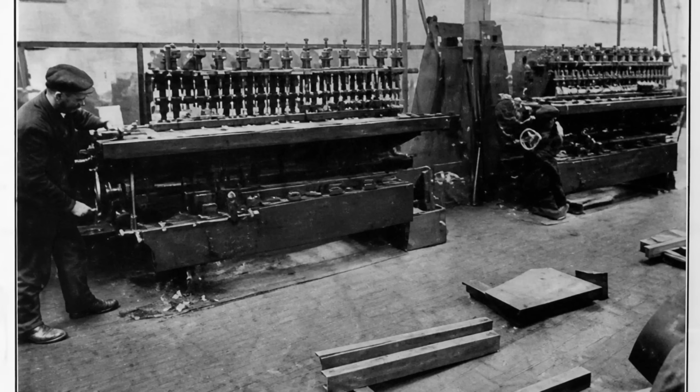At its peak, Alfred Herbert Ltd was the largest machine tool manufacturer in Europe. Its capstan lathes cut the steel for artillery shells in 2 world wars. Its sales network stretched across 5 continents. The Edgwick Works in Coventry covered 23 acres of foundries and machine halls that never stopped running.

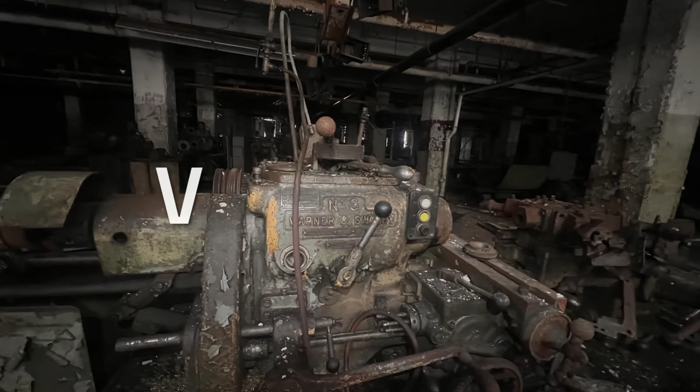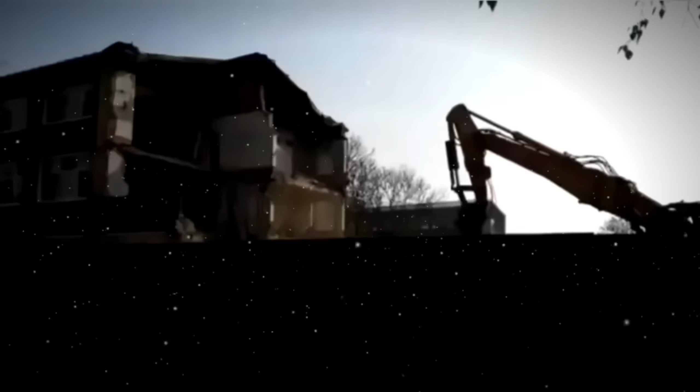Then, in less than a single generation, it was all gone. The British government poured in millions to keep the company alive. It wasn't enough. The wrecking crews tore down every building on the site and replaced it with a retail park. This is the story of the man who built an empire on precision and the company that couldn't survive without him.

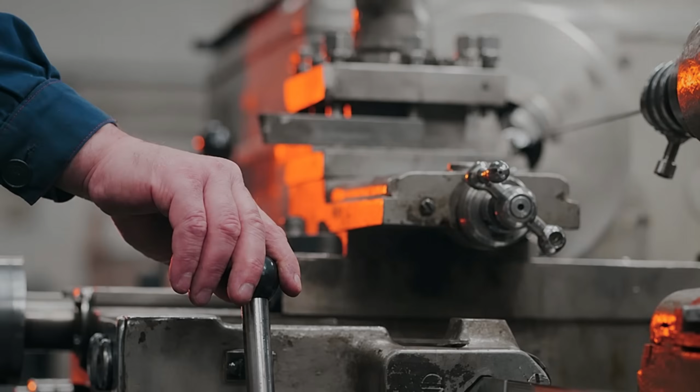Alfred Edward Herbert was born on the 5th of September, 1866, in Leicester, England. His father, William Herbert, was a prosperous man. Not gentry, but comfortable. He farmed 322 acres at Whetstone, south of Leicester, employed 13 men and 7 boys, and owned a townhouse on Regent Street. The family assumed their second son would attend Oxford and enter the church. Alfred had the grades for it. He excelled at English, science, and divinity at Stonygate School.

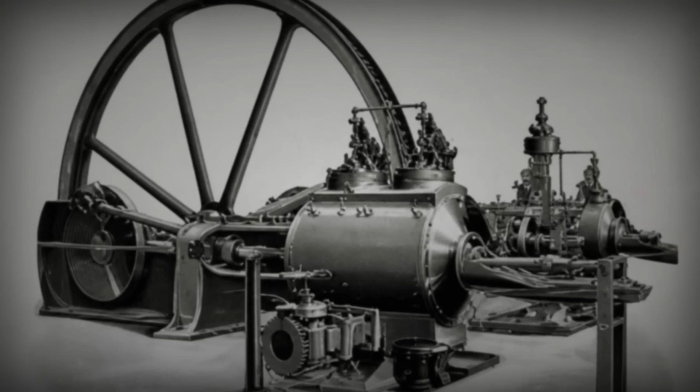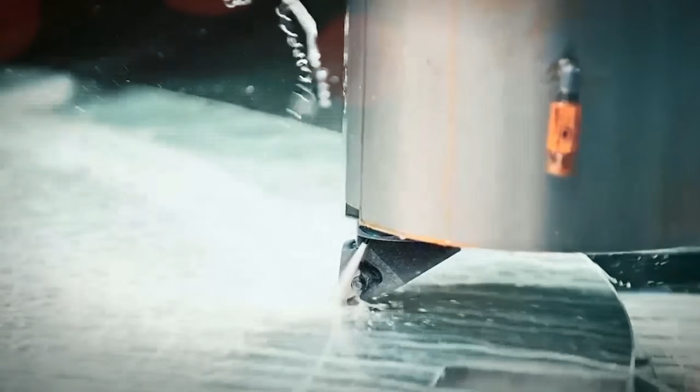But Alfred wasn't thinking about sermons. He was thinking about lathes. An old school friend named William Sammons Hubbard was working at Joseph Jessop & Sons, a crane-building firm in Leicester, and Alfred watched him operate a small metal-turning lathe. The way the tool met the spinning workpiece, the clean curl of swarf peeling off iron. That was the moment. He told his father he wanted to be an engineer, not a clergyman. His father, to his credit, agreed.

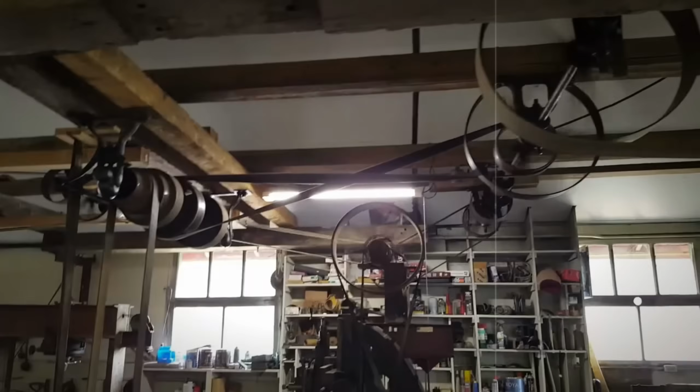Herbert served his apprenticeship at Jessop's through the mid-1880s. It was foundational work. He learned to read castings, to feel tolerances by hand, to understand what separated good iron from bad. By the time he finished, he could walk a foundry floor and tell you which castings would hold up under cutting loads and which would crack. That instinct would define everything that came after.

In 1887, at 21 years old, he left Leicester for Coventry to take a job as works manager at Coles & Matthews, a struggling engineering and repair shop in an area called the Butts. The firm made small boilers and agricultural tackle and barely kept its doors open. Herbert's elder brother, William Henry, was already connected to Coventry's cycle trade through the Premier Cycle Company, and he helped arrange the position.

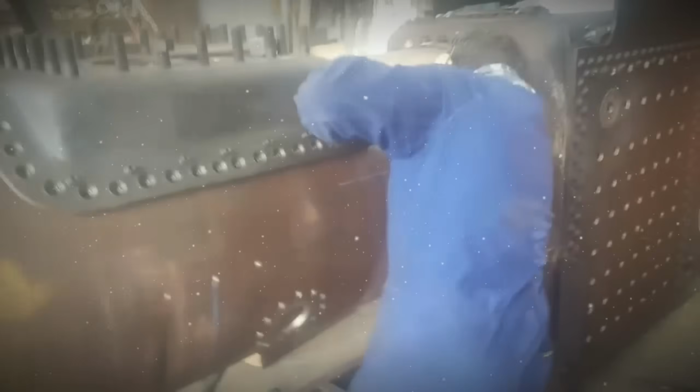The following year, when the owner Matthews retired, Alfred saw his opening. He and Hubbard, his old school friend from Leicester, bought the business for £2,375. Each man's father put up £2,000 in capital. The partnership traded as Herbert and Hubbard, and in the beginning it had nothing to do with machine tools. They built boilers, plowing tackle, steam engines, and whatever else walked through the door. One of their early commissions was a pill sorting machine.

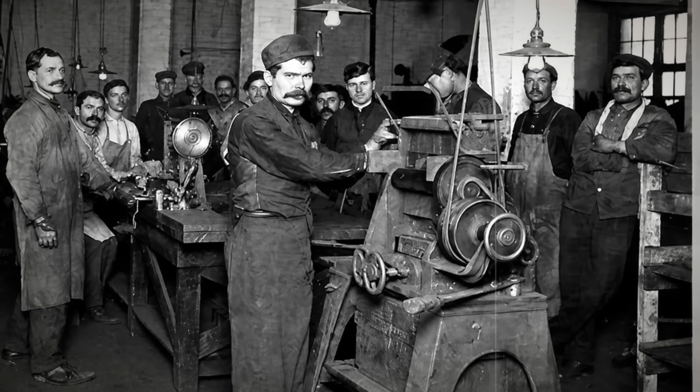What changed everything was Coventry's bicycle boom. By the late 1880s and into the 1890s, the city was the center of British cycle manufacturing, and every workshop needed precision tools to build frames, wheels, and components at speed. Herbert secured the agency for a French patent related to weldless steel tube production, a process critical to making bicycle frames lighter and stronger. The connection came through his brother William Henry, who introduced Alfred to a Paris-based tube manufacturer.

The economic historian Roderick Floud later observed that the firm entered machine tool production almost by accident, pivoting on the profits from that single patent. Herbert and Hubbard began building polishing lathes, drilling machines, rim-bending machines, and spoke screwing machines tailored specifically for the cycle trade.

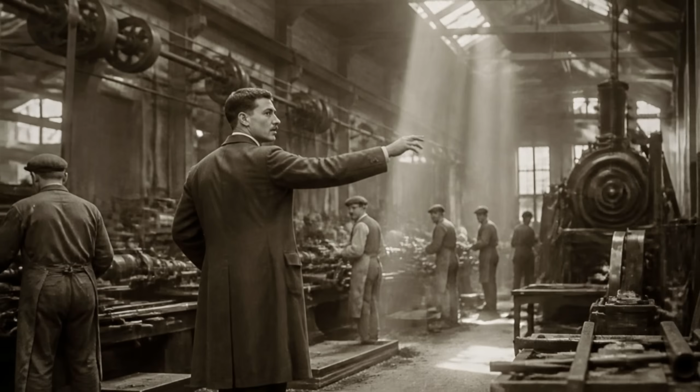In 1894, Hubbard decided to return to Leicester. Herbert bought him out, and the business was formally incorporated as Alfred Herbert Ltd. His brother William Henry became chairman, and Alfred took the title of managing director. He was 28 years old and running his own machine tool company in a city that couldn't build bicycles fast enough.

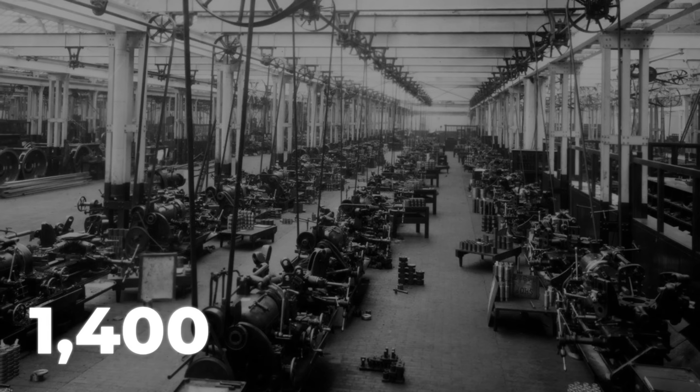Growth came fast. The bicycle trade gave way to motorcycles, and motorcycles gave way to motor cars, and every transition fed more demand into Herbert's order books. The workforce rose from 180 in 1897 to 1,400 by 1908. By 1914, it exceeded 2,000. When William Henry died in 1910, Alfred assumed the chairmanship as well. He now held total control of the company, and he would not share it with anyone for the rest of his life.

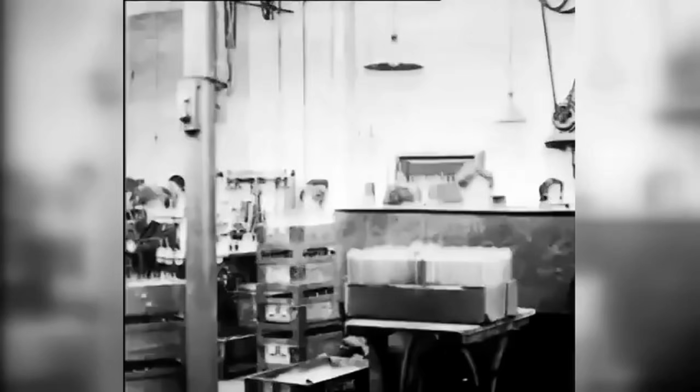But Alfred Herbert was not just building machines. He was building something more unusual, a distribution empire. This is the detail that separates the Herbert story from every other British machine tool manufacturer of the era.

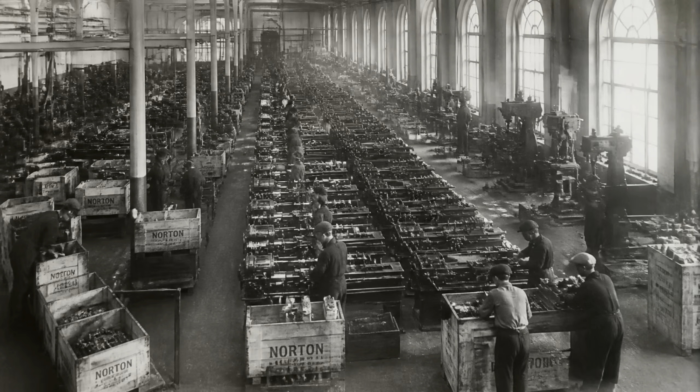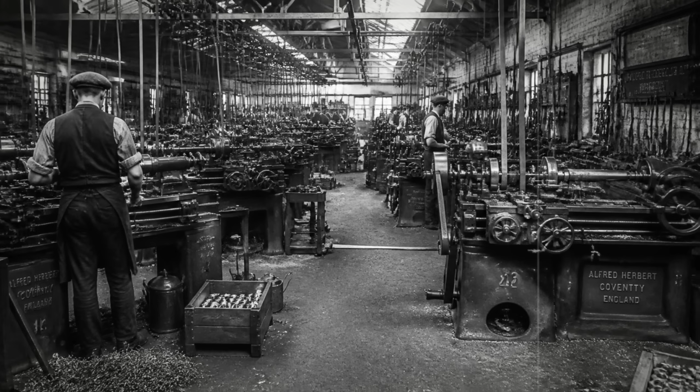Herbert ran what the trade called a factoring operation alongside his manufacturing business. His factories in Coventry produced standardized, general-purpose machine tools: capstan lathes, turret lathes, milling machines, drilling machines, the kind of equipment every metalworking shop needed in volume, and the kind that justified long production runs at Edgwick. However, British industry also required highly specialized, single-purpose machines that only made economic sense in small batches.

Rather than invest in developing those machines himself, Herbert imported them. He secured exclusive distribution agreements with major American and German manufacturers and sold their specialist tools through his own global sales network. Between 1919 and 1937, factoring accounted for roughly 40% of the company's total sales.

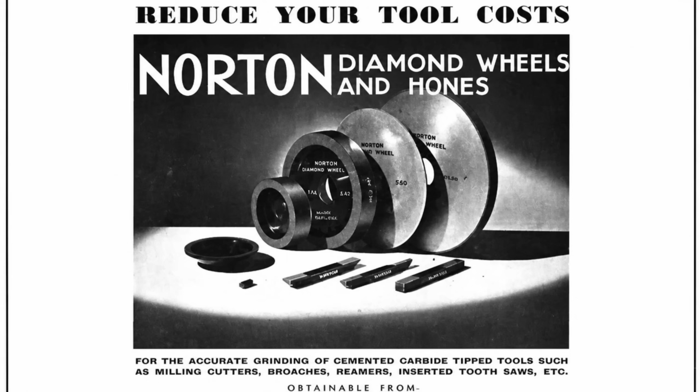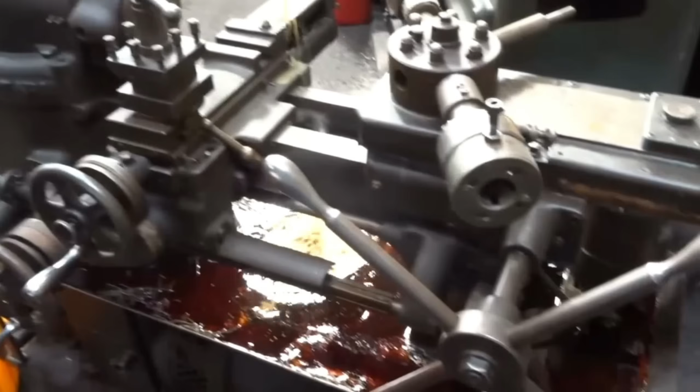Herbert became the exclusive UK distributor for Norton grinding wheels and handled agencies for dozens of other foreign brands. A British factory owner could walk into a Herbert sales office and order everything needed to equip an entire production line: Herbert's own capstan lathes, imported grinders, shapers, boring machines, all from one supplier. It was a complete service.

By 1922, the company had opened its own office in Buenos Aires. Branch offices and agencies stretched across India, Australia, Japan, New Zealand, and Canada. It was brilliant strategy. It was also, as the economic historians Roger Lloyd-Jones and M.J. Lewis later argued in their definitive 2006 study of the company, a slow-acting poison.

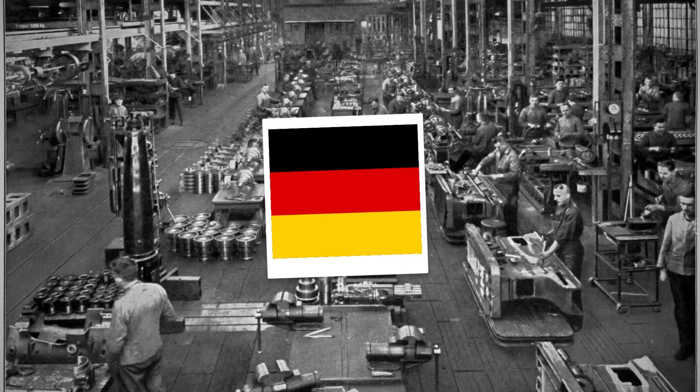By building a business that profited from importing foreign innovation rather than developing it in-house, Herbert had created a company structurally dependent on free trade and on the continued goodwill of the very firms that would one day become its competitors. The factoring model made Herbert rich. It also meant that when those foreign firms stopped needing a British distributor and started competing directly, Herbert had no advanced technology of its own to fall back on.

Herbert's personal life, meanwhile, had taken a turn that would have been deeply scandalous in Edwardian England. He had married Ellen Adela Riley in 1889, the daughter of a Coventry bank manager, and they had 4 daughters. But the marriage deteriorated over more than 2 decades, and in 1913 their divorce was finalized. Divorce was rare in that era, socially ruinous for most people. For a prominent industrialist and public figure, it was almost unheard of.

The scandal was compounded by the fact that in the same year the divorce was granted, Herbert married Florence Lucas, a widow who had been a matron at the Coventry and Warwickshire Hospital, where Herbert served as chairman of the board. He had dissolved a 24-year marriage and married a hospital matron in a single calendar year. Coventry talked. Herbert carried on regardless.

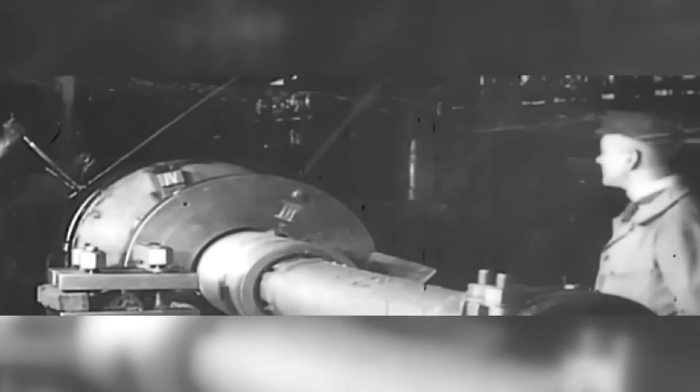When the First World War broke out, Herbert's expertise became a matter of national survival. Machine tools were the bottleneck of armaments production. You could not manufacture artillery shells, rifle barrels, or aircraft components without them, and Britain needed them at a scale nobody had anticipated. In 1915, the Ministry of Munitions appointed Herbert as Deputy Director General and later Controller of Machine Tools.

Putting him in charge of marshalling the entire British machine tool industry's output for the war effort, he was created a Knight Commander of the Order of the British Empire in 1917 for this service. He also received the French Legion d'Honneur and the Belgian Order of Leopold.

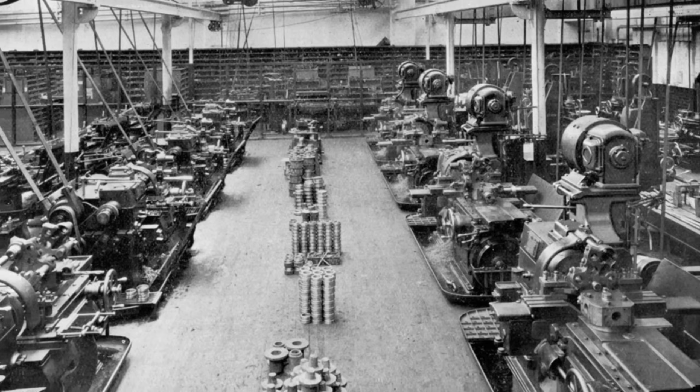Back at the Edgwick Works, the factory had consolidated into a massive complex on a roughly 23-acre site northeast of Coventry city centre, bounded by Cross Road, the Coventry Canal, Stony Stanton Road, and Foleshill Road. Three iron foundries, pattern shops, machine halls lined with rows of lathes and drilling machines, erecting bays where finished machines were assembled and tested, administrative offices, a laboratory. The physical scale of the place was matched by Herbert's approach to running it.

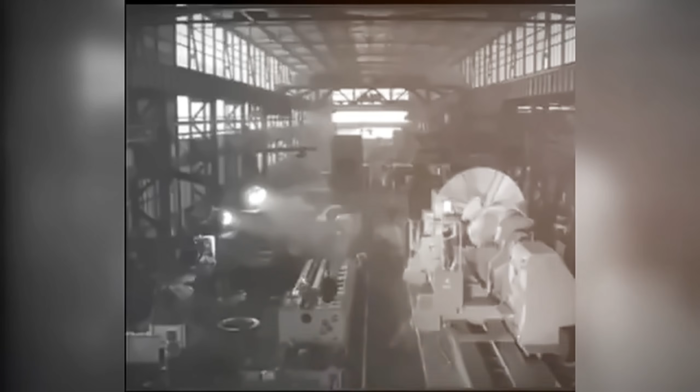He walked the shop floor at all hours, including night shifts. According to factory lore, defective castings were sometimes smashed in front of workers publicly to enforce a culture of zero tolerance for poor quality. Herbert tools were to be, in his own framing, works of art.

He implemented a piecework bonus system that rewarded collective efficiency and could substantially increase a man's weekly wage. He funded company sports clubs, social societies, and safety programs. He provided support for sick or struggling workers.

In December 1926, the company launched the Alfred Herbert News, a monthly staff magazine distributed free to every employee. It celebrated worker achievements, documented company sports results, and promoted what people inside the company called the Herbert spirit.

But Herbert's generosity came with a condition that no one was allowed to question. He was fiercely anti-union. New employees signed agreements stipulating they would not join a trade society or participate in any strike. During the volatile labor climate of the 1920s and around the 1926 general strike, Herbert cracked down on organizing.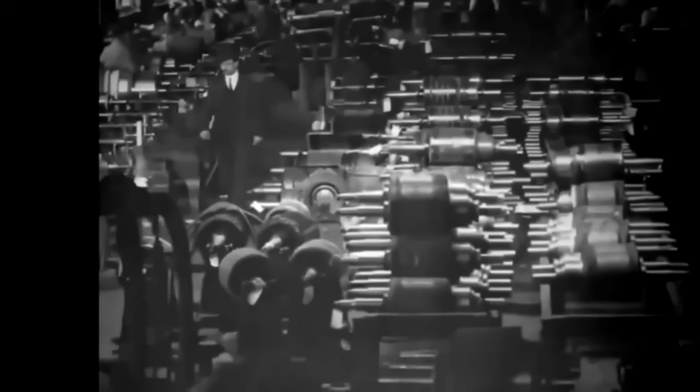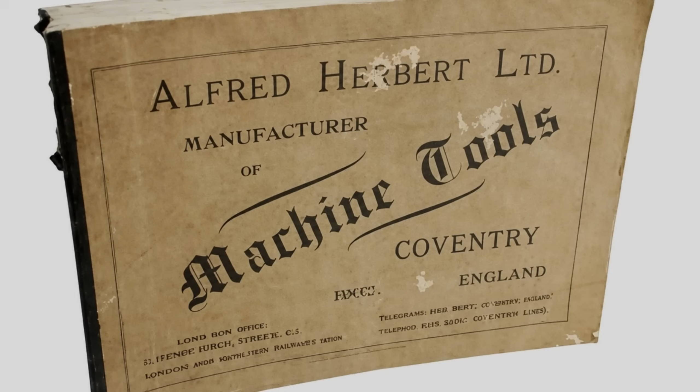Workers who wanted to unionize did so in secret at the risk of immediate dismissal. It was paternalism with an iron fist inside the velvet glove. He took care of his people. He would not, under any circumstances, let them take care of themselves. This arrangement persisted for the entirety of Herbert's life. Unions were not officially recognized inside Alfred Herbert Ltd.

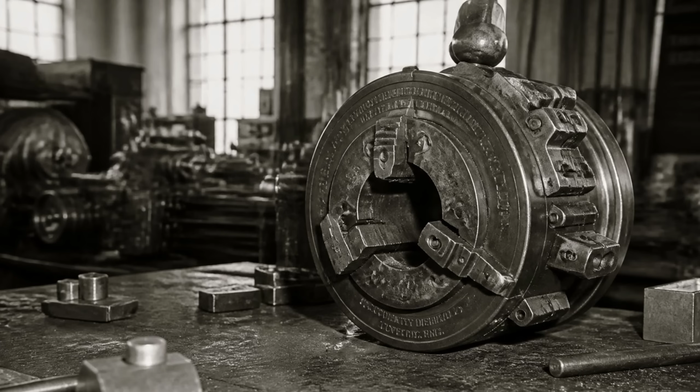Until after his death. The interwar years produced two of the company's most distinctive products, neither of which was a lathe. The first was the Coventry self-opening die head, a threading tool that had been in experimental development since 1901 and reached its definitive Style C form around 1907.

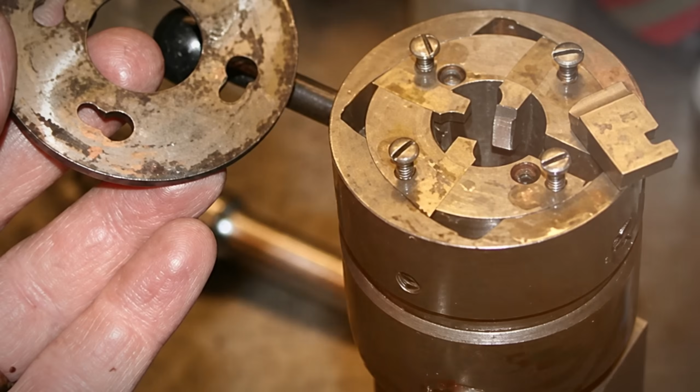Threading is one of the most fundamental operations in metalworking. Every bolt, every pipe fitting, every threaded component requires it. The die head automated external thread cutting with a precision and repeatability that made it an industry standard across the world. Machine shops from Birmingham to Buenos Aires relied on it. The Coventry die head remains in production today, under different ownership.

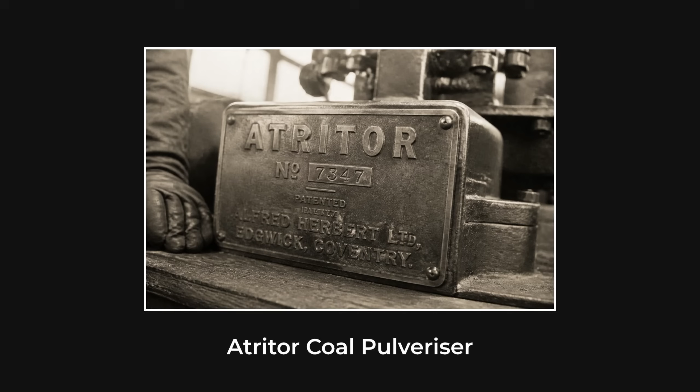The second was the Atritor, a coal pulverizing machine developed in 1927. The Atritor's origin is often attributed in company histories to an unnamed relative or cousin of Sir Alfred. The actual inventor was Charles Edward Blythe, Herbert's brother-in-law, who had married Alfred's sister Fanny in 1901. Blythe ran cement works and needed a machine that could dry and pulverize lump coal, then blow the resulting powder directly into rotary kiln combustion chambers at precisely controlled rates.

Nobody made one, so he brought the problem to Alfred's engineers at Edgwick. They built the Atritor using high-chrome iron castings, tough enough to withstand the relentless abrasion of coal dust grinding against metal at high speed. What started as a family favor became a global product line used in cement works, power stations, and mineral processing plants across 5 continents. The Atritor division would outlast the company that built it.

By 1928, the whole firm had consolidated at Edgwick. Profits in the 1930s ran at approximately £600,000 a year. Herbert received the honorary Freedom of Coventry in 1933.

Florence Herbert had died in 1930. In her memory, Alfred commissioned Lady Herbert's Garden, a public garden and almshouse complex built around the surviving remnants of Coventry's medieval city walls. He hired his cousin, the Leicester architect Albert Herbert, to design it. The East Garden opened in April 1931, and the almshouses for elderly Coventry women were completed between 1935 and 1937. The ornamental bronze railings and gates carry Florence's initials.

In 1938, Herbert donated £100,000 to the Coventry City Council for the construction of an art gallery and museum. Construction began the following year and stopped when the war broke out.

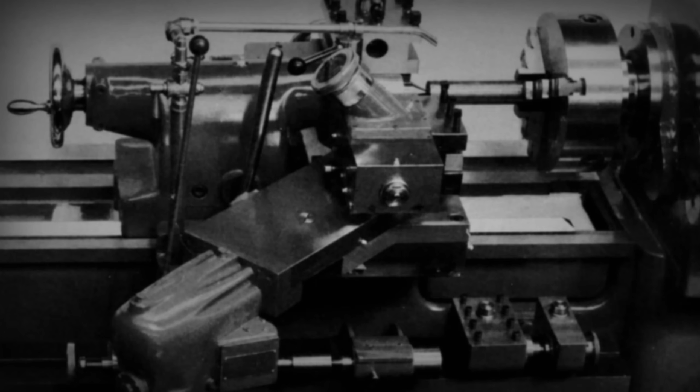The Second World War tested the company and its city to the breaking point. Alfred Herbert Ltd. was one of the primary manufacturers of the capstan lathes that kept British armament production running, and that made it a target.

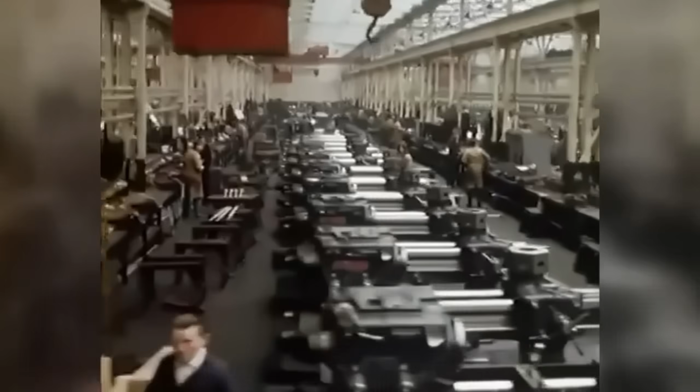As men were drafted into the armed forces, the company recruited large numbers of women for war work, putting them on heavy grinding machines, lathes, and assembly lines. Herbert, in his mid-70s, was a vocal critic of employers who resisted hiring women, and he transformed his own factory floors to prove the skeptics wrong.

King George VI and Queen Elizabeth visited the works in August 1940. Then, on the night of the 14th of November 1940, the Luftwaffe devastated Coventry in one of the most concentrated bombing raids of the entire war. Over 500 people were killed.

Tens of thousands were made homeless. The medieval cathedral was gutted. Factories across the city were hit. Herbert's own almshouses at Lady Herbert's Garden were damaged.

According to family accounts, Herbert had been persuaded to shelter that night with his granddaughter in Leamington Spa. He watched the sky burn from a window, pacing in distress, repeating, 'My poor men, my poor men.' The Edgwick Works were damaged, but not destroyed. Workers returned to the surviving bays.

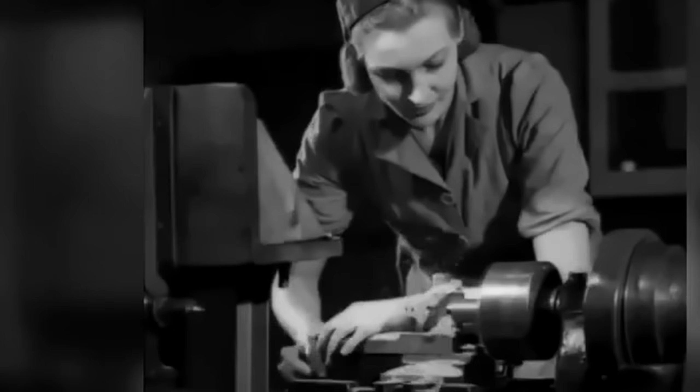Production resumed under wartime conditions that pushed men and machines to the limit, round the clock, with improvised repairs and substitute materials. Herbert donated £20,000 toward rebuilding the Coventry and Warwickshire Hospital.

In March 1944, Alfred Herbert Ltd. became a public company listed on the London Stock Exchange. Herbert was 77 years old.

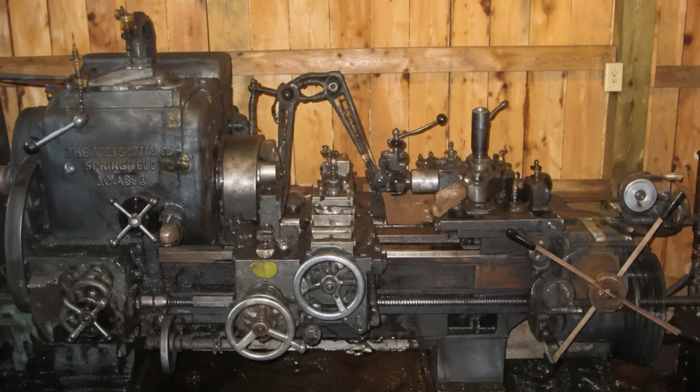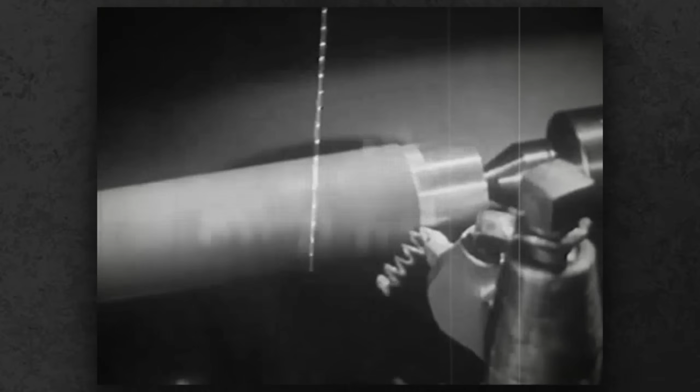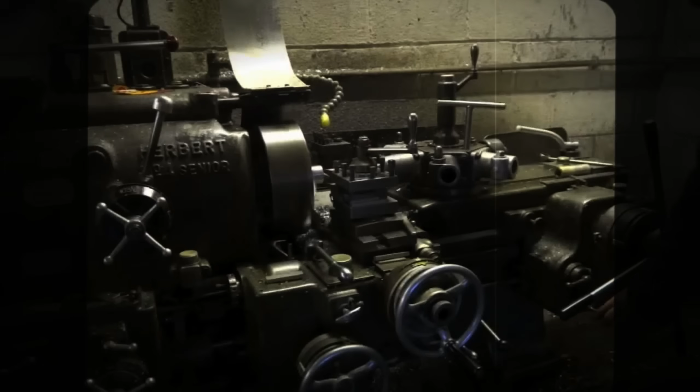After the war, the company introduced the product line that cemented its reputation among machinists worldwide. The pre-optive headstock was a capstan lathe innovation that allowed the operator to pre-select the next spindle speed while the current cut was still running, then engage it instantly through a friction clutch. Anyone who has stood at a manually geared lathe and lost 30 seconds every time a speed change was needed understands what that meant for production throughput on a multi-operation job. Select the speed, pull the lever - the new speed engages without stopping the spindle.

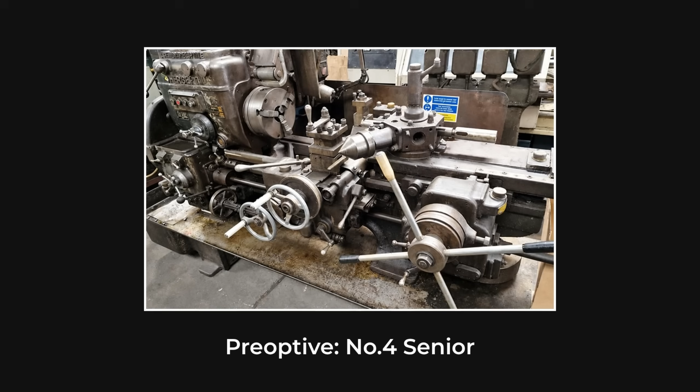The pre-optive mechanism was applied across the company's flagship range, including the No. 4 Senior and the No. 7 combination turret lathes, heavy machines built for large bar work and chuck work in automotive, naval, and aerospace applications.

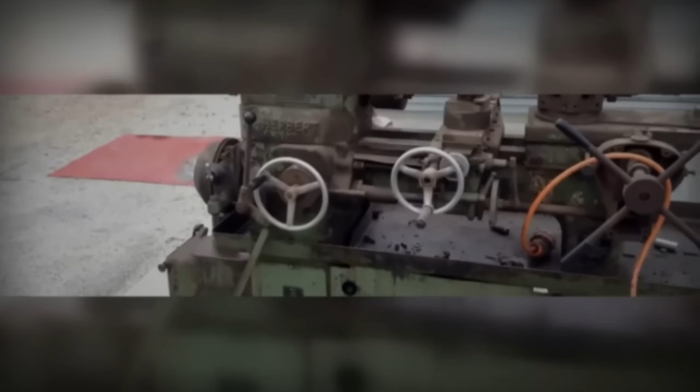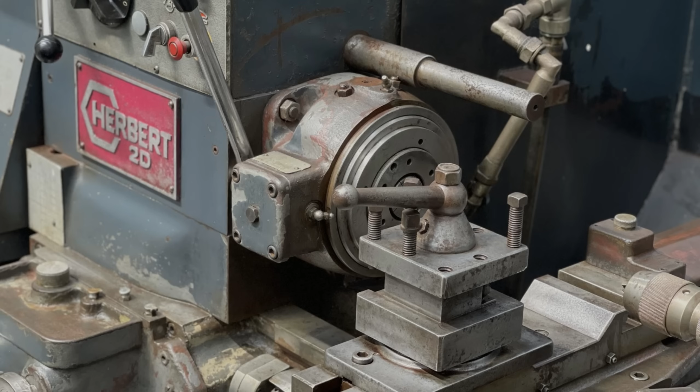The No. 2D capstan lathe, an older design that Herbert had refined relentlessly across decades, remained the backbone of the product line. 16 speeds, 50 to 2550 RPM, built like a bridge. The 2D was the machine British manufacturing ran on. Thousands were built, and surviving examples from the 1950s are still turning metal in workshops today. Among vintage machinists, a Herbert 2D in good condition is not a museum piece. It is a working tool.

Herbert never retired. On his 90th birthday in 1956, his workers collected funds to build the Alfred Herbert Ward at the Coventry and Warwickshire Hospital. He distributed roughly £25,000 among his employees. The Machine Tool Trades Association, of which he was president, established a traveling scholarship in his name.

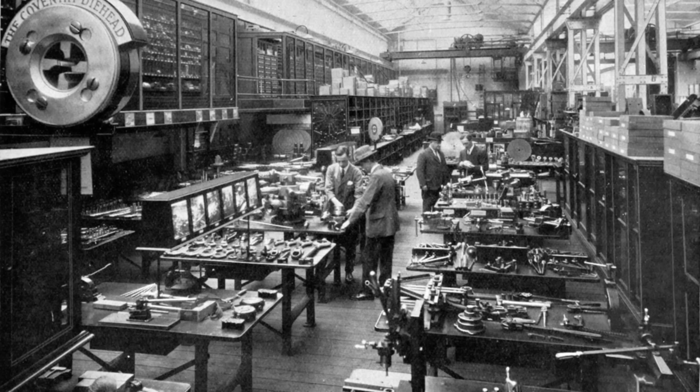Sir Alfred Herbert died on the 26th of May, 1957, at Hurstbourne Priors in Hampshire. He was 90 years old. More than 2,000 people attended his memorial service in the shell of the bombed Coventry Cathedral. Trade unions were recognized inside his company within months of his passing. He had held that line for nearly 70 years.

The Herbert Art Gallery and Museum opened on the 9th of March, 1960. His widow performed the ceremony. Herbert had laid the foundation stone in May 1954 and donated another £100,000 to guarantee its completion. He never saw the finished building. Today, the museum still bears his name and draws hundreds of thousands of visitors annually.

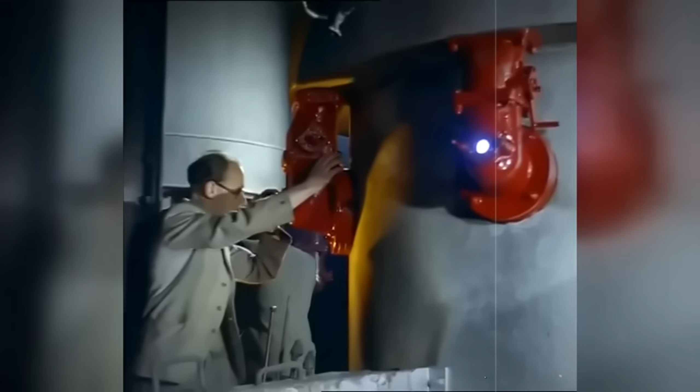But the company Alfred Herbert built did not survive the world he left behind. The leadership that replaced him was cautious, conservative, and unprepared for what was coming. Herbert had run the company with autocratic personal oversight for nearly 7 decades. The succeeding board of directors were competent engineers, but they were not Alfred Herbert. They did not have his instinct for where the market was moving, and they did not have his willingness to bet the company on a decision.

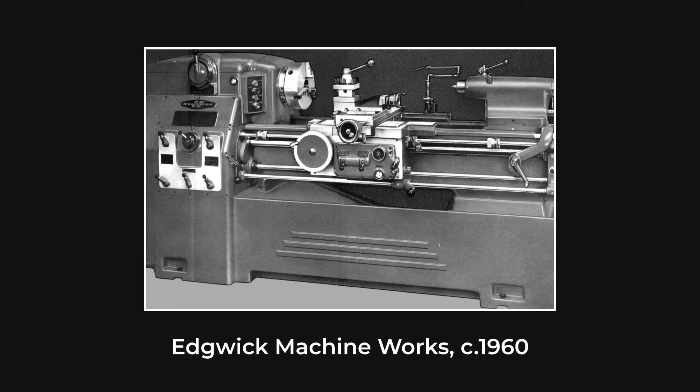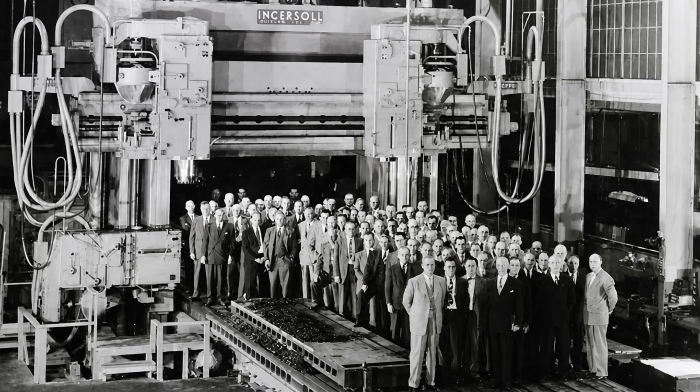The firm acquired the Holbrook Machine Tool Company around 1960. In 1966, it merged with BSA's machine tool division, absorbing the prestigious Churchill Machine Tool Company. In 1967, the American firm Ingersoll Milling Machine Company took a 49% stake, forming Herbert Ingersoll and building a purpose-designed, numerically controlled factory at Daventry. On paper, the company was modernizing. The Daventry plant was everything Edgwick was not - new, purpose-built, equipped for the age of numerical control. In practice, the company was falling behind.

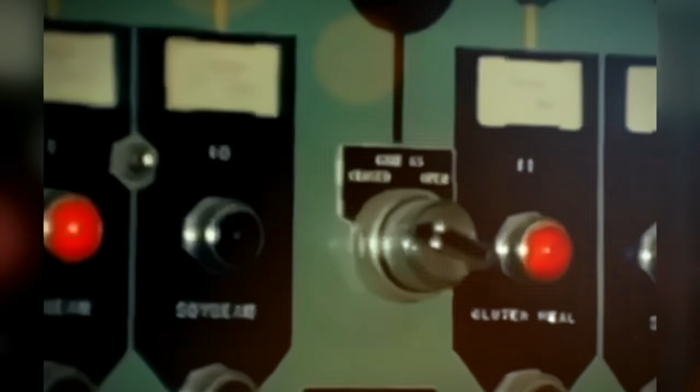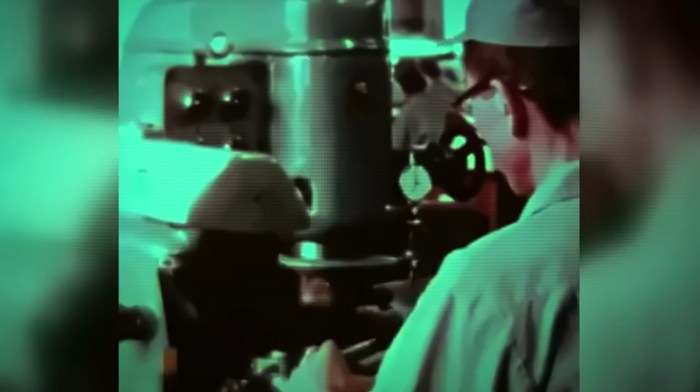The revolution in machine tools was numerical control, and then computer numerical control. American firms had pioneered it. German companies like Gildemeister and Traub were commercializing it, and Japanese manufacturers, Yamazaki Mazak, Mori-Seiki, Okuma, were pouring resources into CNC technology at a pace no British firm could match. They were building machines that could run complex programs with minimal operator intervention, producing parts faster and more accurately than any manually operated capstan lathe ever could.

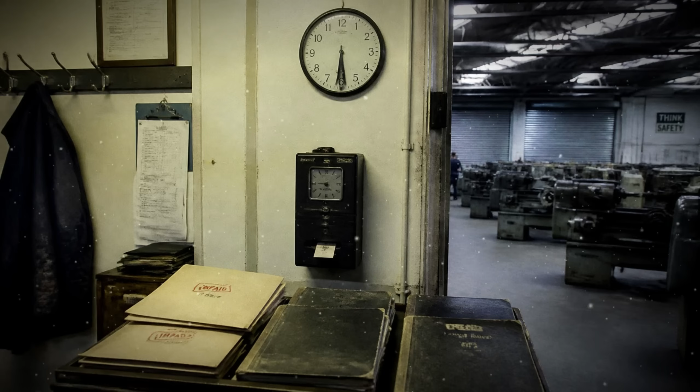The economics were devastating. A CNC machining center could do in one setup what had previously required 3 separate machines and 3 separate operators. Herbert's management believed their traditional product line could be incrementally adapted. They believed the factoring network would fill the gap for any advanced technology they did not make themselves. They were wrong on both counts.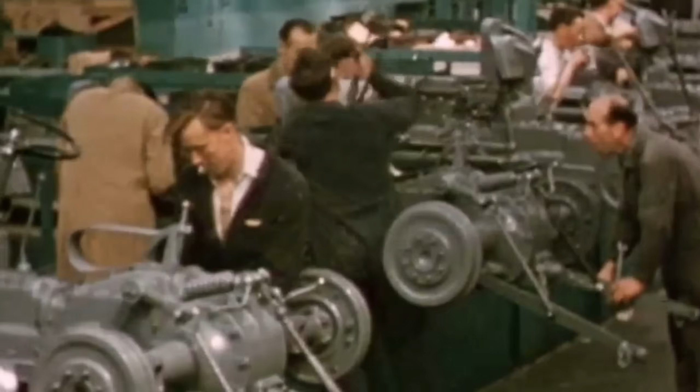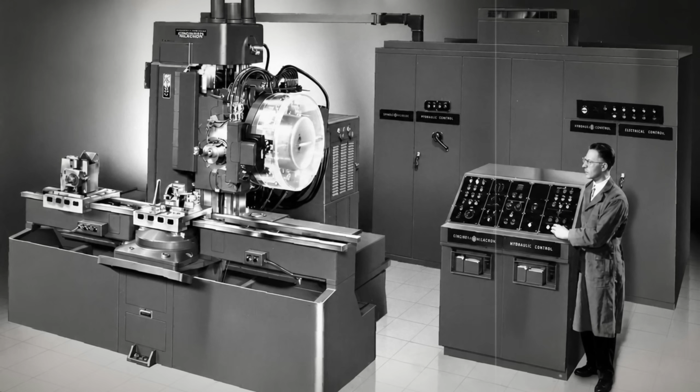The factoring model that had made the company rich was now a strategic liability. The foreign firms whose machines Herbert had been distributing for decades no longer needed a British middleman. They were setting up their own sales operations in the UK and selling directly to the same customers Herbert had once owned.

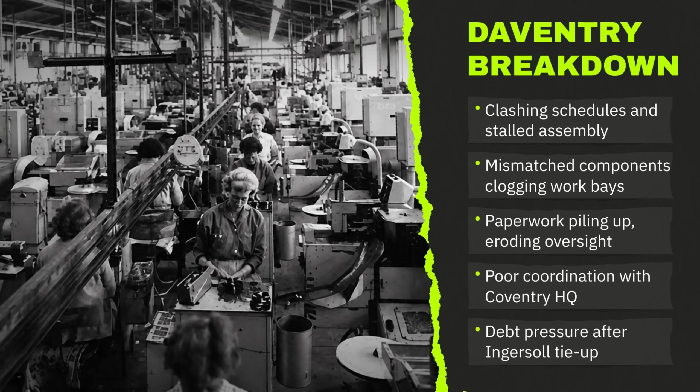The Herbert Ingersoll venture at Daventry, which should have been the company's bridge to the future, was plagued by mismanagement, poor coordination with the Coventry parent, and financial strain. BSA sold its entire holding in Herbert in August 1971, writing off nearly £7 million. The joint venture eventually collapsed into receivership.

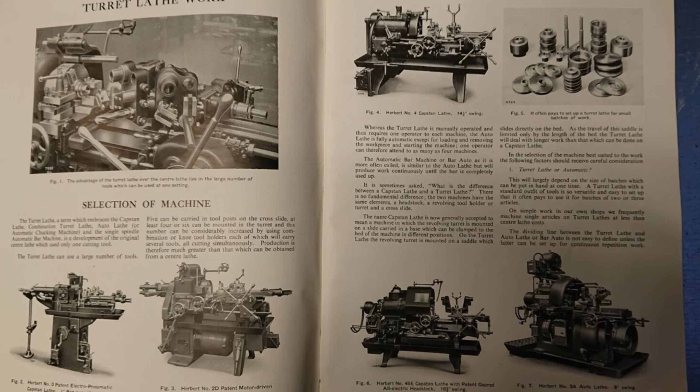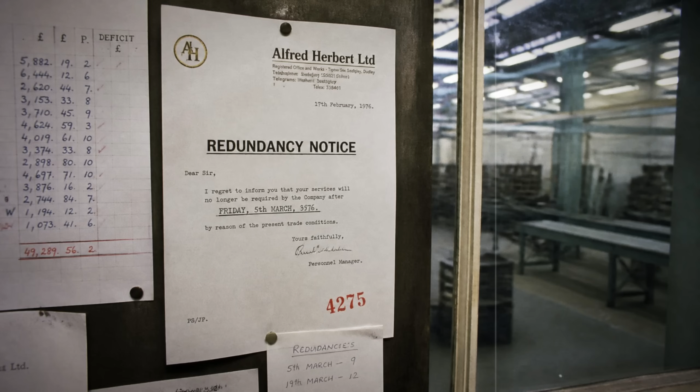The parent company was left with its aging Edgwick Works, a product range that increasingly belonged to the previous decade, and a global market that was moving away from it at speed. By the early 1970s, the workforce had peaked at roughly 12,000 across 9 plants stretching from Rotherham to Falmouth. Those numbers masked the reality. Losses were mounting. The oil crisis, rampant inflation, and industrial disputes battered the remnants of the British manufacturing base. Herbert, once the undisputed leader of British machine tools, was in critical condition.

The financial collapse was staggering. A decade earlier, the company's stock market valuation had sat at approximately £43 million. By 1975, it had cratered to around 800,000. Shares traded at 4 3/4 pence.

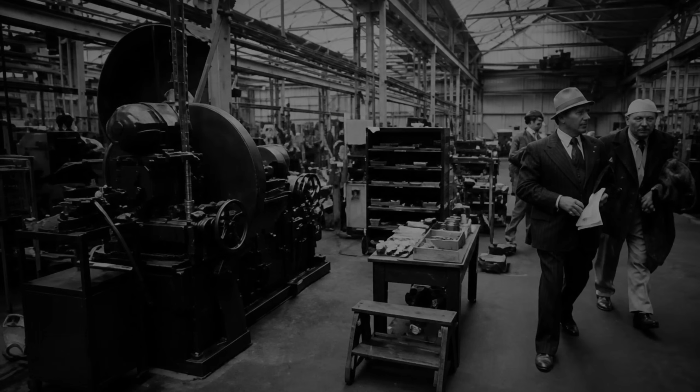On the 9th of July, 1975, the Secretary of State for Industry, Eric Varley, stood in the House of Commons and announced that the government would inject up to £25 million of public money into Alfred Herbert, primarily as equity through the newly formed National Enterprise Board. The firm was effectively nationalized. It was renamed Herbert Ltd. The company still employed roughly 6,000 people.

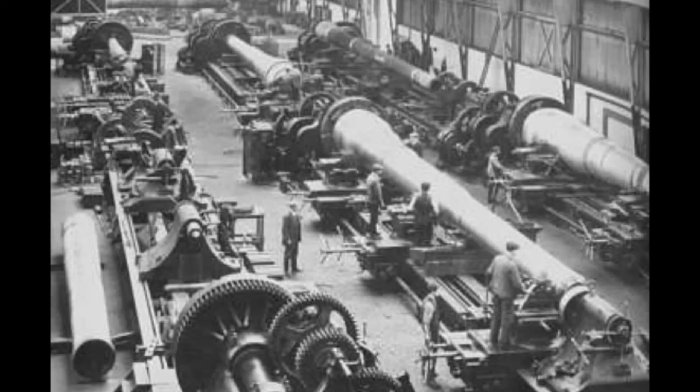The parliamentary debate that followed was brutal. Michael Heseltine called the case for spending public money on the company one of the most inadequate he had ever heard. Varley, pressed on the decision, admitted something remarkable. His own Industrial Development Advisory Board, the government's expert panel on these matters, had recommended letting the firm go into receivership. Varley had overruled them. He believed the social cost of losing thousands of jobs in Coventry outweighed the economic logic of letting an obsolete firm die. It did not matter.

The money could not fix what was broken. You cannot buy your way out of technological obsolescence. The CNC revolution was not approaching. It had already arrived. Japanese imports were cheaper, faster, and more precise than anything Herbert could offer. The company continued to lose money year after year.

In 1980, the National Enterprise Board refused further funding. The High Technology Division was sold to GEC. The rump business was acquired by Tooling Investments, which itself went into receivership in 1982. Tube Investments purchased what remained. The company closed in 1983 with debts of approximately £17 million.

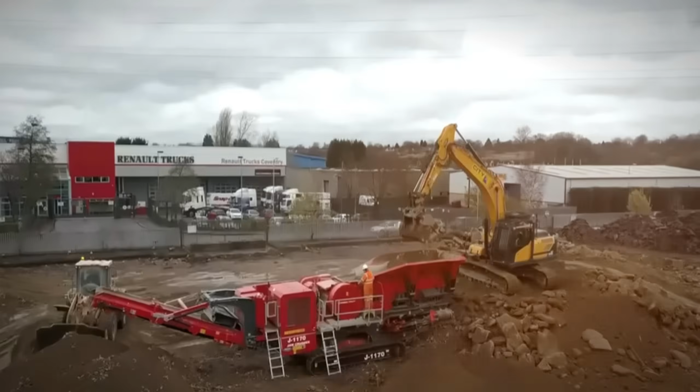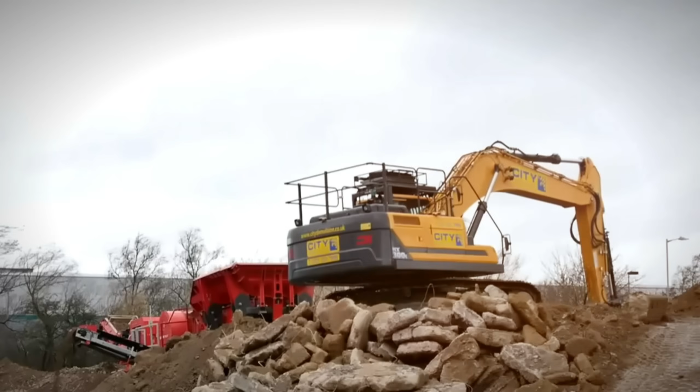The entire contents of the Edgwick Works were sold in a 5-day auction held in Bay 26 of the factory. The machines, the tooling, the fixtures, the furniture, decades of accumulated capability, all of it went under the hammer. The auction raised about £750,000. Then, the wrecking crews arrived. Every foundry, every machine hall, every office building was demolished. The site was cleared and eventually redeveloped as the Gallagher Retail Park. There is nothing left of what was once the largest machine tool factory in Europe.

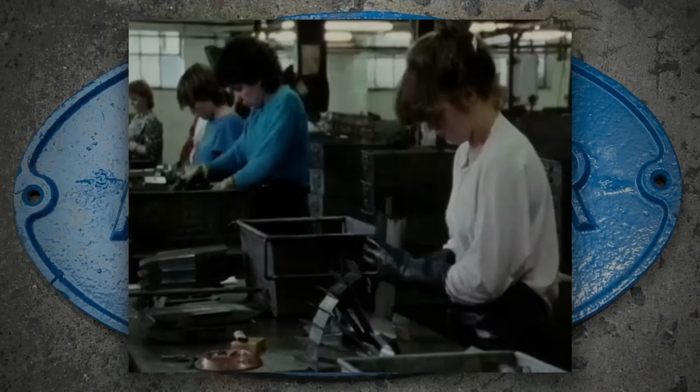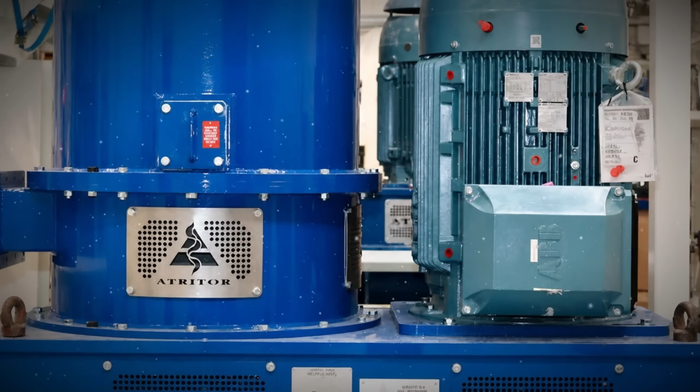But not everything that Alfred Herbert created disappeared. The Atritor division was incorporated as its own company in February 1980 and survived the parent's collapse entirely. Atritor Ltd still operates in Coventry today, still building drying, milling, and classification equipment, still running a foundry and machine shop. The Coventry self-opening die head remains in production under different ownership.

Lady Herbert's garden still stands around the medieval city walls, the bronze gates still carrying Florence's initials, still open to the public. And the Herbert Art Gallery and Museum, now called simply the Herbert, draws hundreds of thousands of visitors each year to a building that exists because one man wrote a check for it, twice.

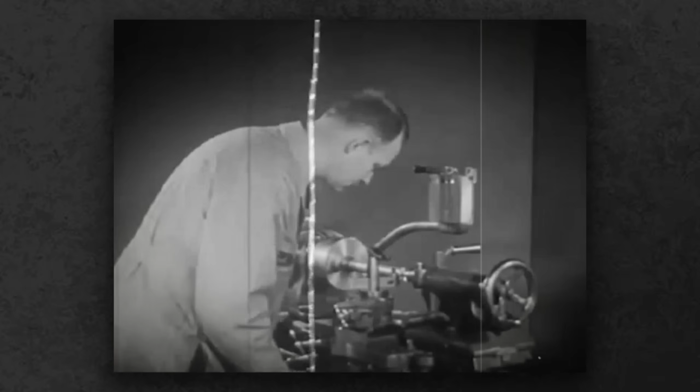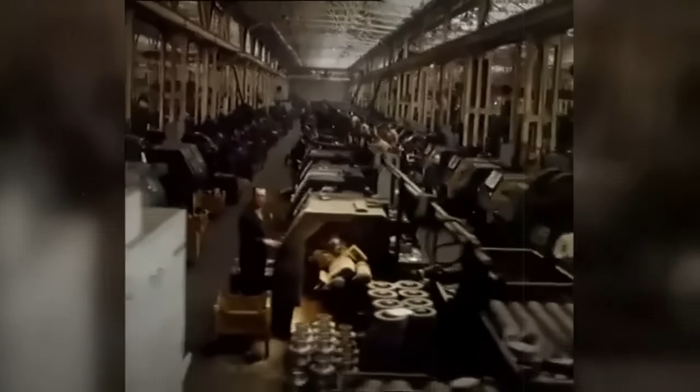Sir Alfred Herbert built a company that armed a nation, employed a city, and defined an industry for the better part of a century. He did it through mechanical intuition, relentless quality control, and an absolute refusal to let anyone tell him how to run his factory. But the empire he built was an extension of the man himself. When he died, so did the instinct that had kept it ahead. The company that could build the finest capstan lathes in the world could not build the future that replaced them. The machines survived. The factory did not.